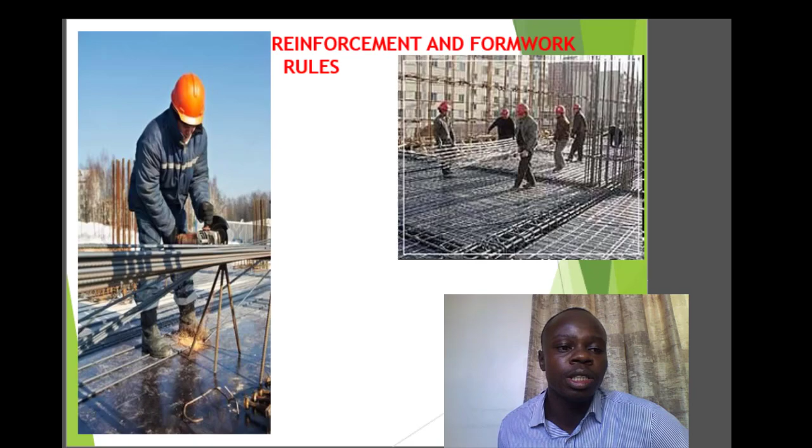Of course, there are the types of reinforcement. We'll have the Y or the T. Now those are the high tensile, and also the mild steel. So depending on which one you are applying, or for what purpose you are using that given reinforcement bar, then you will select the appropriate one.

And of course, the design for structural is also bestowed on the structural engineer, but then you, as an estimator or quantity surveyor, you basically need to know at your fingertips the type, so that at times when those details are not provided, you can make the right or informed assumption for that matter.

Yeah, that's why I've talked about, there is an abbreviation for that, Y or T, that we'll look into later on. So Y/T simply means the high tensile bars, especially used for reinforcement.

Also they are always described in terms of the diameter of those specific bars. You'll also see how, when we come to actual estimation or calculations, those diameters directly relate to what you have as the ultimate pricing of those given reinforcement bars.

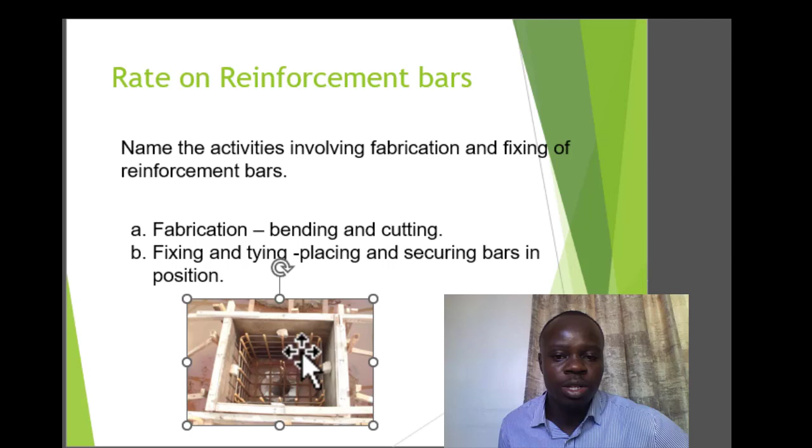So for relevance and also to stay focused on this course, there are these items that you might be aware of, but now we emphasize their relation to your estimation, so that you put it into perspective for those that might have seen it somewhere but are not certain of how to carry that forward into actually giving it an estimate.

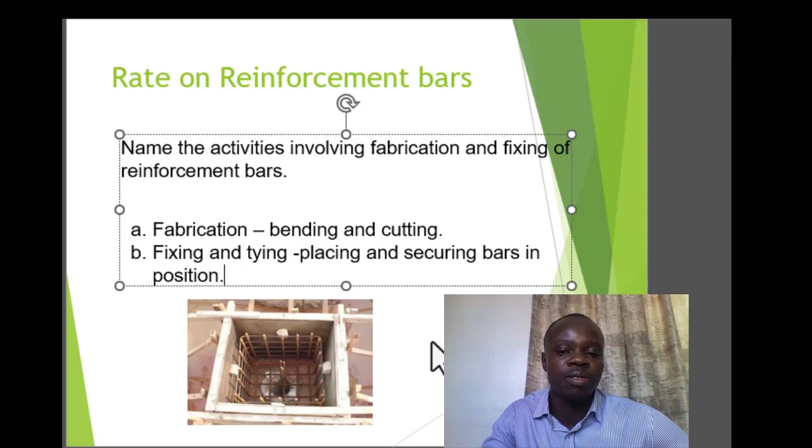So we need to learn the specific rules that guide you to take off the reinforcement. What do you need to refer to, and how do you do that in real sense and price and so on. That is coming at later stages of our beginner series for you to learn.

Okay, so these are some of the sequences that are available for our construction, and you can see them there. We have bending. You've bent the bars, you've prepared them in the shape that is required, and then you have the formwork. It's placed in position, ready to receive the concrete, plus all those considerations for the spacers and so on.

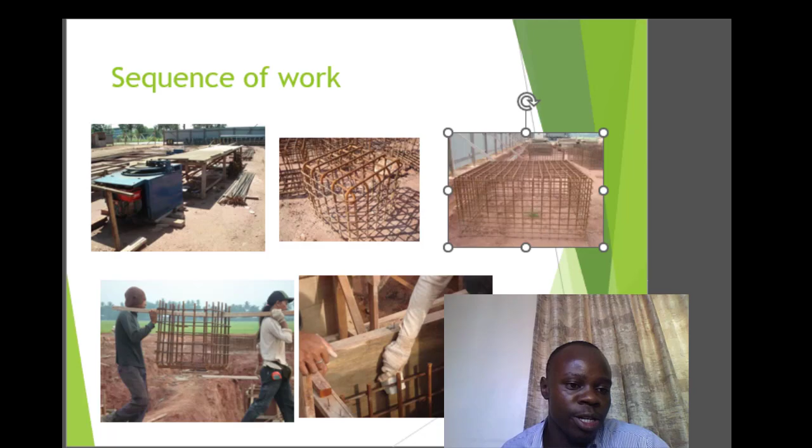This is just to show you a description, for you to actualize and internalize what we are talking about in terms of the reinforcement sequence of placement. So the reinforcement bars to slab. These are just examples, items that you might have interacted with while on site or not.

So this channel wants to put into perspective how they arrived at bringing this number of bars in place, or how they arrived at the cost of this particular reinforcement for given elements for that particular work. So that said, we have different ways of placement.

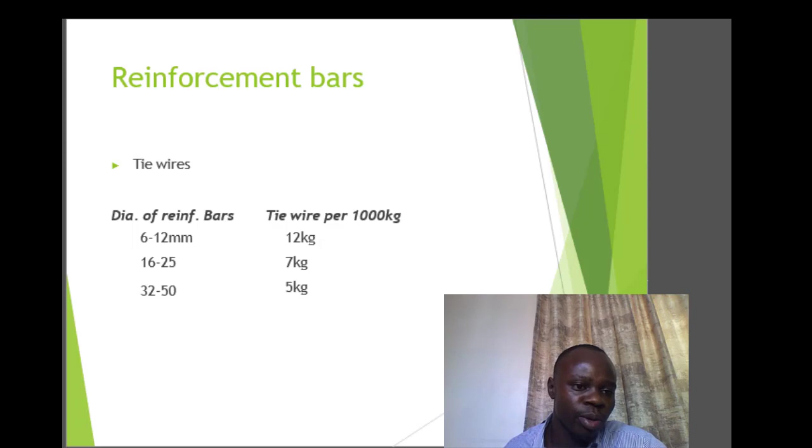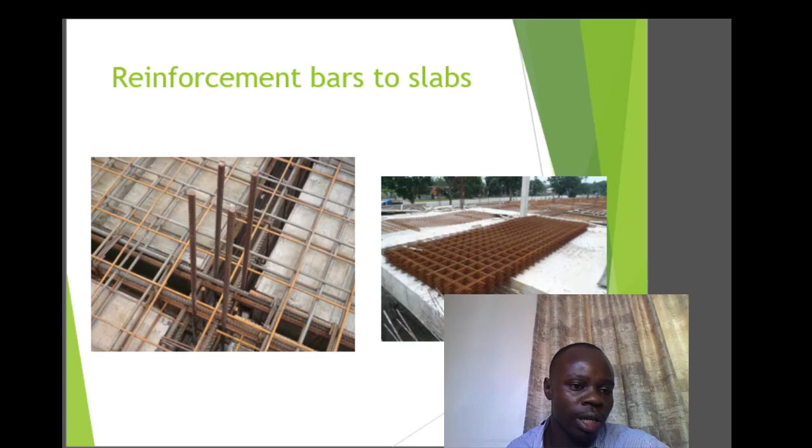Here we have the beams, there is a tying wire and so on. You have the long main bars, and then you have the ones called the links that are put across, especially for columns and also for your beams. So we'll see what the rule states about this. We've talked about reinforcement. This is how it looks, how they are placed.

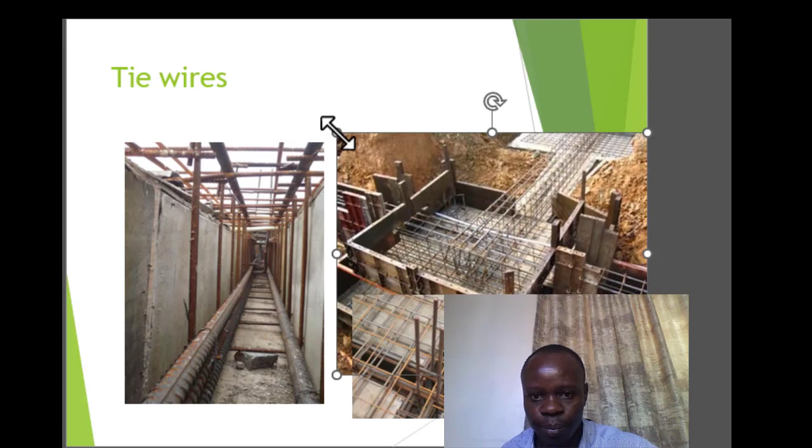Okay, so these are some of them. Let me just try to show it even better, so you're able to see it well. Yeah, that's better. I'll override the one at the back so that we focus on this one for now. So this is an example of the reinforcement that has been placed, ready to receive the concrete.

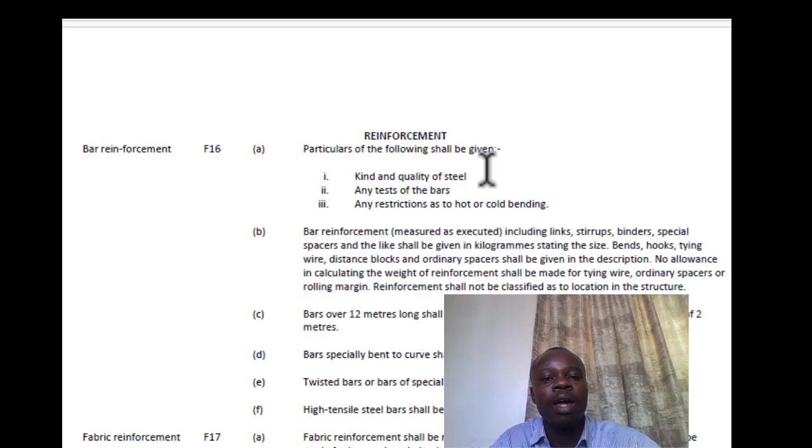So I would like us to look into the standard methods. What do the standard methods say about how to carry out the measurement for reinforcement bars? The standard method of measurement, the SMM, talks about kgs. So when you are carrying out the estimation for bars, you talk about kgs. But you can notice that when you look at the layout of how the reinforcement bars are placed, you can't directly tell how many kgs that is, but you can tell the length of those given bars.

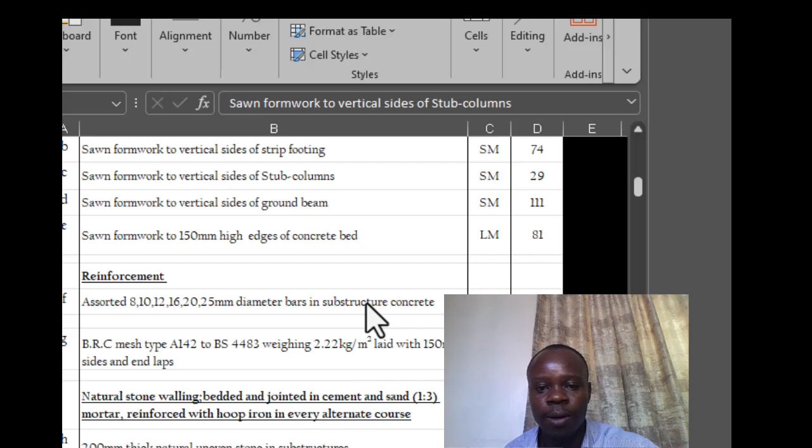So let me take you to the bills of quantities and we see how that has been expressed. We are talking about reinforcement. In this case they were assorted. To assort simply means that you measure all those items as one, rather than separating them in terms of diameters. So for every specific type of bar, for example D8, D10, D12, D16, D20, D25, all those are expressed in terms of kgs. So how did you arrive at kgs?

So I'll just give a hint, because this is an interesting topic that I always enjoy explaining, and however hectic it is, it's very interesting. You always feel the thrill when carrying out items to do with reinforcement. Unlike the other items, I'll give a hint to how we'll carry out this particular one, so that we appreciate how this was arrived at.

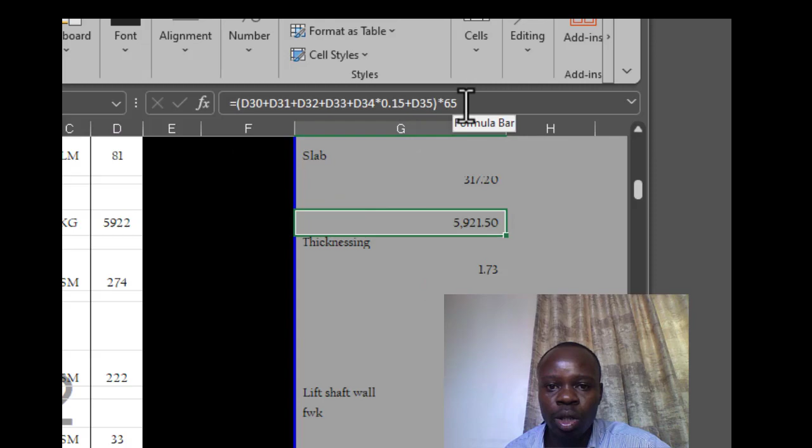Normally you talk about the specific items making up the kgs for that particular item. Let me give an example based on a different one. Say you have a beam, and your beam is 10 meters long. For the 10 meters, say you are using D12 bars for the main bars running along. So for the 10 meters you will take, for example, 10 meters.

So you'll have the length. You focus on the length because that is now what you can directly take off or measure from your given elements that have been provided. So you take the 10 meters and then you multiply by 4, because you're assuming that you have 2 at the top and then 2 at the bottom of that particular beam. So 10 times 4, that is now the total length.

Once you have that, then there is now a relation of the length, and then we now convert it into kgs. So normally it's the length that you have, and then you multiply by the diameter of that particular bar, squared. We've talked about D12, so 12 times 12, and then you divide by 162.

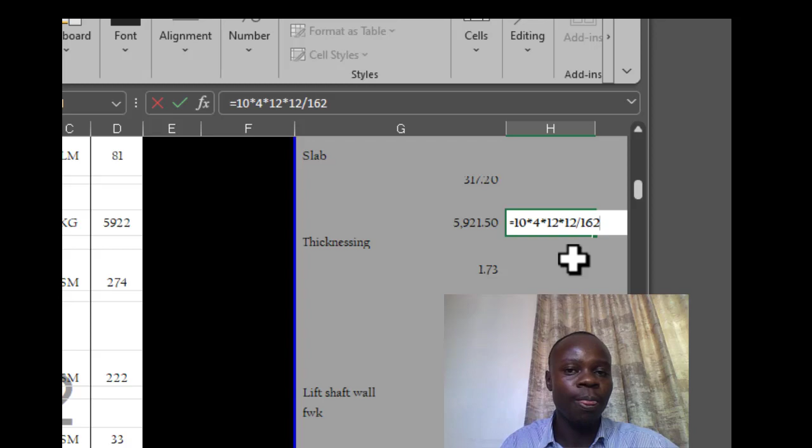So 162 is basically a constant that is used to convert length of the particular reinforcement bars into kgs. At some instance you might realize that there are those that use specific constants, for example 0.888. Those are normally a converted figure arrived at through the diameter squared divided by 162. So once you have that, you should be having your kgs. So that is now kgs for the main bars.

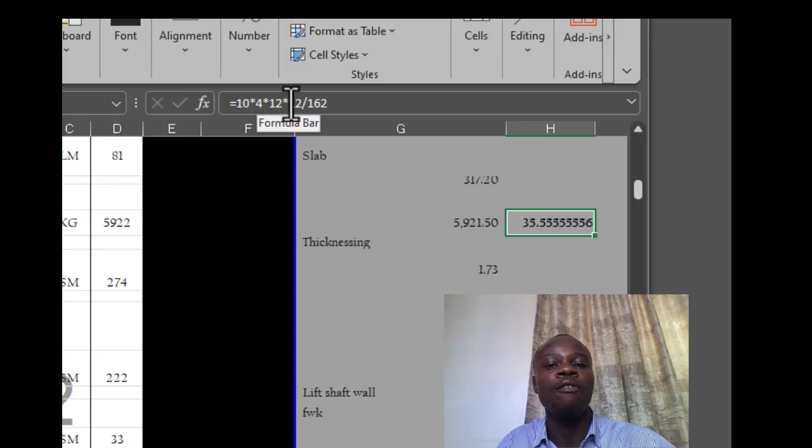But then now you'll need to go a notch higher and also add the kgs for the links, so that you have the full reinforcement for that particular beam. So you have the kgs for that particular one, and then we can also add to it the links that we've said. So for the links, we'll assume D8.

D8, and then our beam, for instance, is a beam of 200 on the breadth or the width, and the depth, let's talk about 300, so that we just talk about an average size of beam. We'll also talk about this further when we'll be taking off from the actual drawings, translating into quantities, pricing, and making up the full bills of quantities.

But for now, because this is an area that is so interesting to me, it's one of those items that I've decided to bring in-depth explanation on how to carry out the works. So we talk about the links for the reinforcement beams, and this is how it goes. We are using an example of a 200 breadth and 300 deep beam for that particular structure. So what we need to do first is get the length of that link.

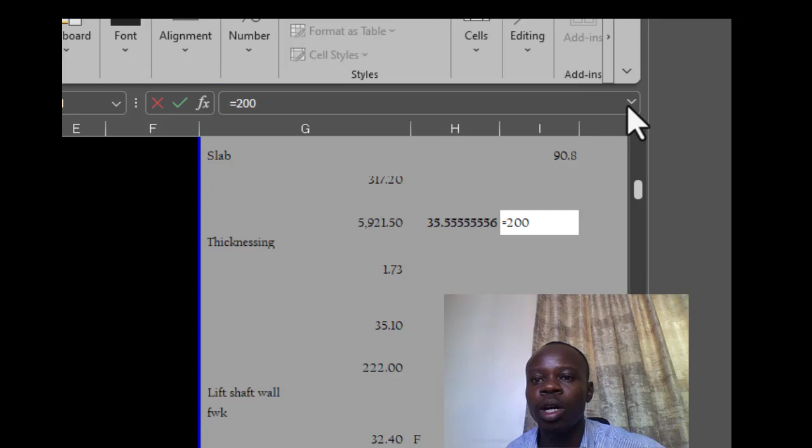From the 200 we less 25 on either side, so that is 25 times 2, so that we have the length of the reinforcement bar at the bottom, the width in that case. So that we get 150, and then we add to it the depth of that particular beam. We said it's 300, therefore we need to do 300.

We can put this into brackets so that we don't have a mix-up in terms of what we are carrying out. So we have 300, then we do the same, 25 at the top for concrete cover, and also 25 at the bottom for concrete cover. So that is another 25 times 2. That brings us to the total for the length and width. In this case we can add another bracket outside, so that we take our resultant figure and multiply it by 2, because we're now having basically a perimeter of that particular reinforcement bar. So we multiply by 2.

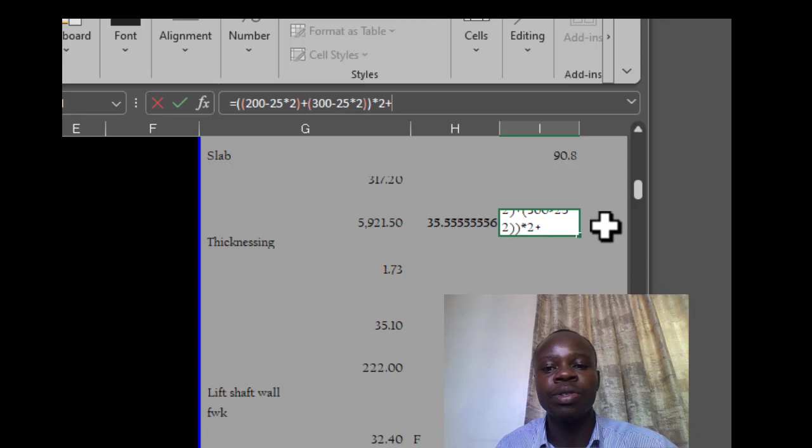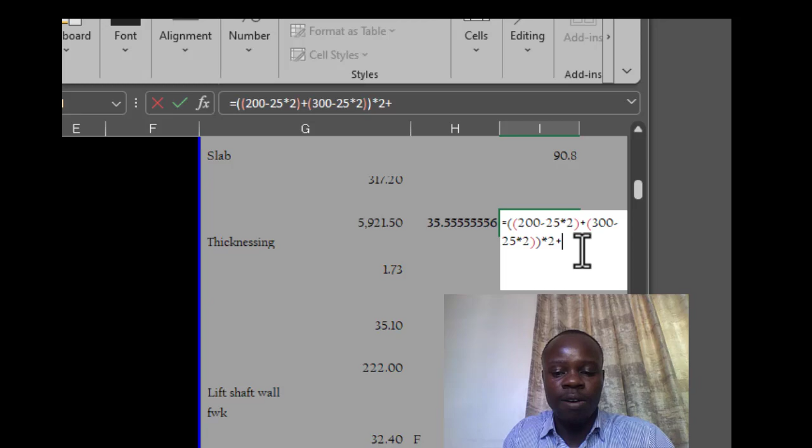So all those will be covered later on as we move deeper into the details of these reinforcement bars, cover, and so on. Trust me, these items are very interesting, and you will learn more and more as we go on. So we can take the hooks to be, for instance, 50 millimeters in this case, 50 times 2. So we have 900 millimeters for the length of that particular link.

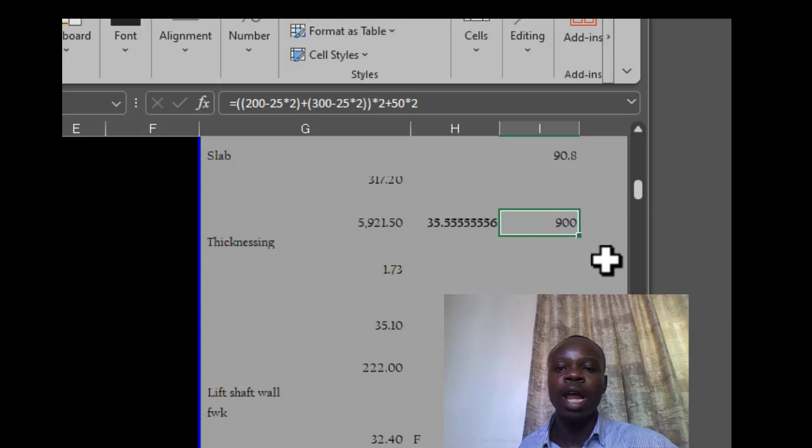So once we have the length, we adopt the other procedure that we had. So this is now the length. Of course, the length has to be in meters. So that is 900, which will be 0.9 in meters. Then you multiply by the diameter squared, that is 8 times 8, then you divide by 162. Of course, there is something we have missed out: the number of those bars. They are links spaced at 200.

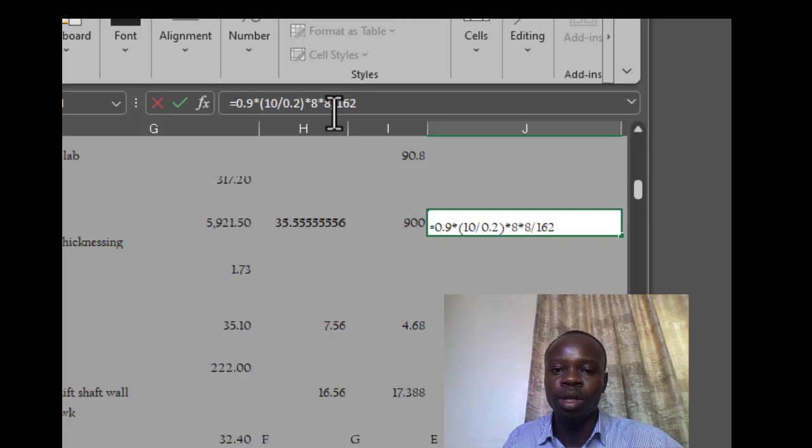So let's talk about that here. In terms of the number, 0.9 is one of them, and then we multiply by the number. In brackets, we said it's an ideal 10 meter long beam. So it's 10 divided by the spacing. In this case, let's talk about a spacing of 0.2 meters. Then you multiply by that. So in this case, we should have 17 kgs of reinforcement.

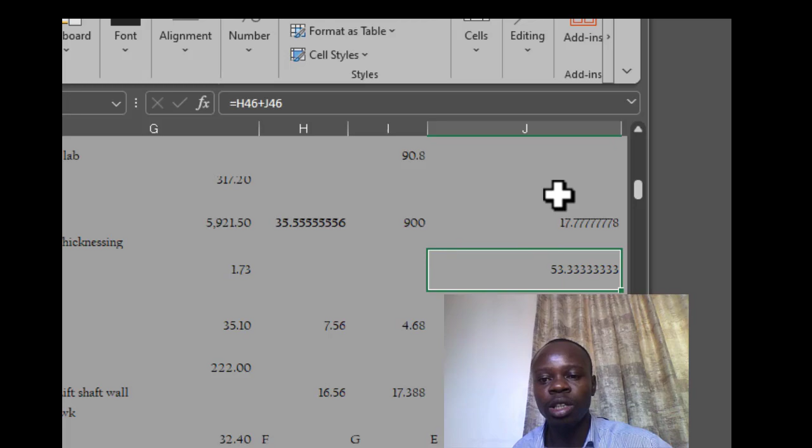Then we add the main bars, which were 12 millimeters dia, and then we add the links, that is 8 millimeters dia, and then we have 53.3 kgs for the reinforcement of that particular beam. So from the length you have, you can now relate to how you arrive at kgs.

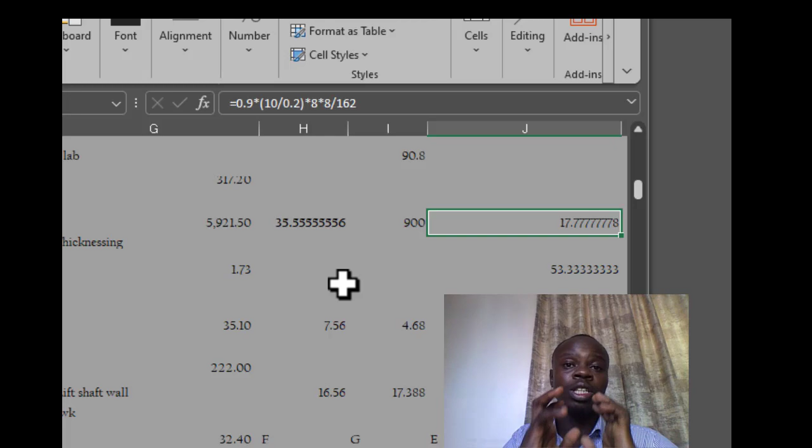Just to bring in a point, that method of measurement is constant in terms of translating your length. For instance, if you are using other forms of measurement that require you to do it in tons, let me say new rules of measurement, then you simply need a way of converting this. Once you have your length from your drawings, you might have a constant already done for you to convert that length into kgs or tons. Alternatively, you can have other constants to convert it into kgs.

But as you are aware, the relation of numbers is constant across, so even if you are watching this video from a different geographical area where other standard methods of measurement are applicable, you have your kgs. It can easily be converted into tons by dividing by 1000. So I told you that reinforcement is quite interesting because of the diversity. If it's a reinforcement bar, you do it in kgs, and if you need it in tons, you can straight away do that.

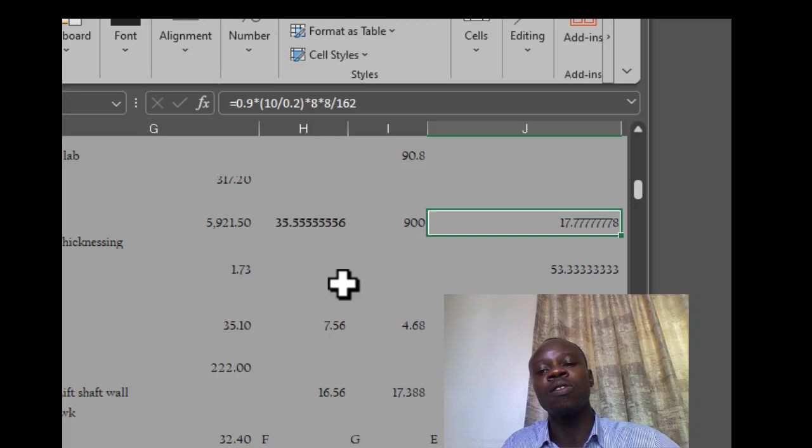You can also Google conversion factors. Conversion factors may be online, and that can be done in just a click. So it's interesting, but you need to know how they build on each other in terms of how to relate and how to do your measurement and get your estimation right.

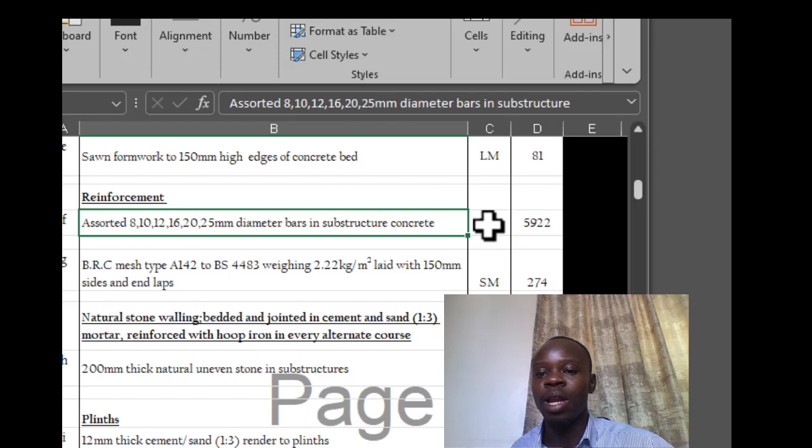So that is well explained, I believe, and it's really going to help you moving forward, even before we get into actual calculations based on actual drawings, which we will do together one-on-one till you understand how it goes. You now have an idea. In fact, you can now take off a basic structure. You can take off and measure the reinforcement of a given beam or column, because it's so easy based on what I've just explained to you.

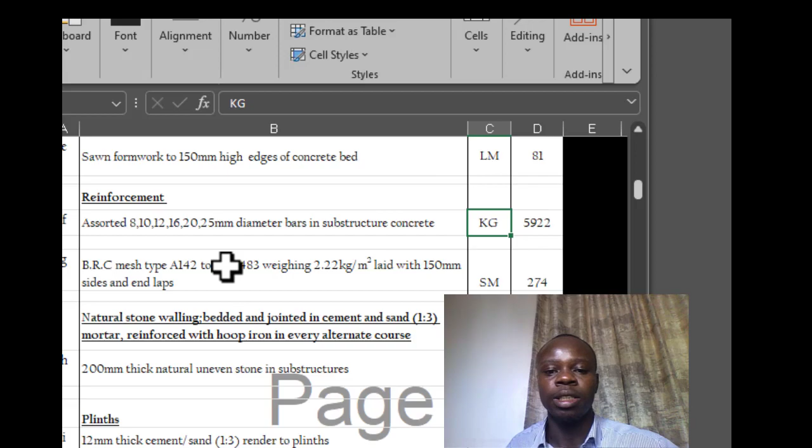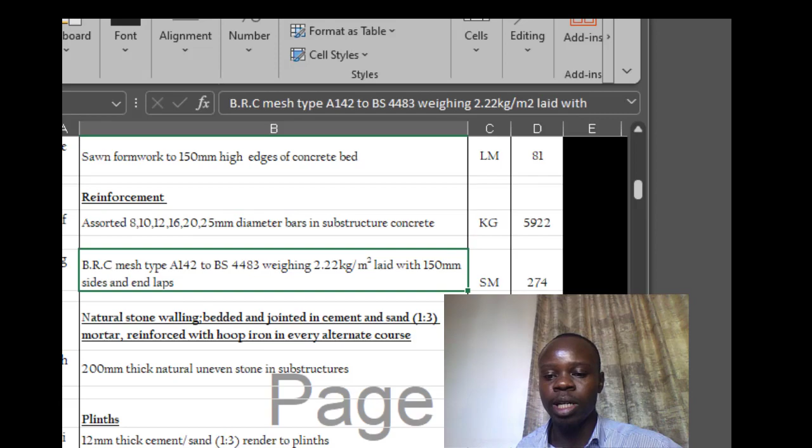The pricing, which you will come to realize later on, depends on the cost of material, labor, and so on, which will be built up as we go on with our coverage and estimation. Now this one is done in square meters. You can confirm from this, it is the fabric reinforcement. This one is here. Let me just highlight it if you can't see that well.

Yeah, so we have it in terms of square meters. Okay, so you can find it there. Basically you have to remember that this is still part of section F, talking about concrete building up in terms of all the items that are associated with it, including reinforcement, including formwork, because it's one and the same thing. But then they are different in terms of the materials associated with them and how it's done, but it's under what we call reinforcement work.

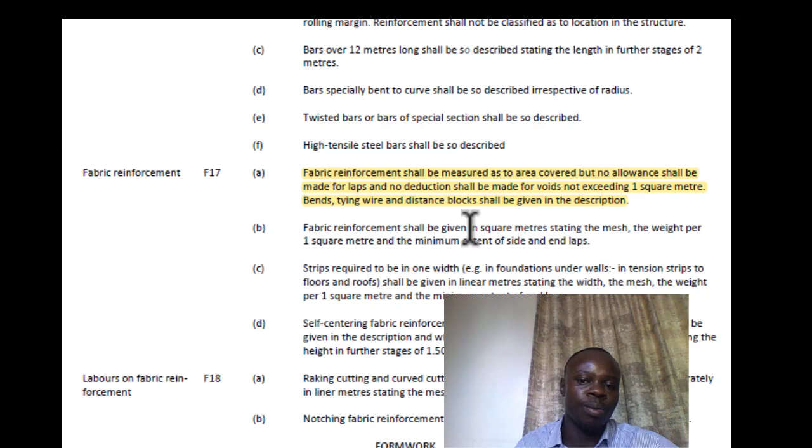So all those are falling within section F of the standard method of measurement. And this is across as well in terms of the works I've handled. Also in those other rules, you'll find concrete, and then there's also a subsection of concrete works. There's a subsection of concrete, a subsection of fabric reinforcement, bar reinforcement, and so on. So we've talked about that, and I believe it's quite well taken for you in terms of understanding.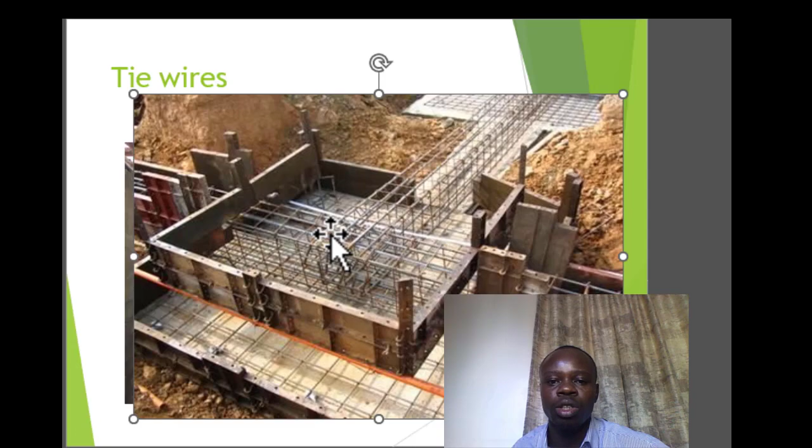Now we move to the last section on the coverage for this particular session. That is now the formwork. You want to just see how this is carried out. So for your formwork, formwork depends on where you're laying it, or the purpose of that given formwork. Let me just give a brief presentation here so that we see. So we are talking about formwork, whose definition can be, as it has been presented there, a mold or open box container into which fresh concrete is poured.

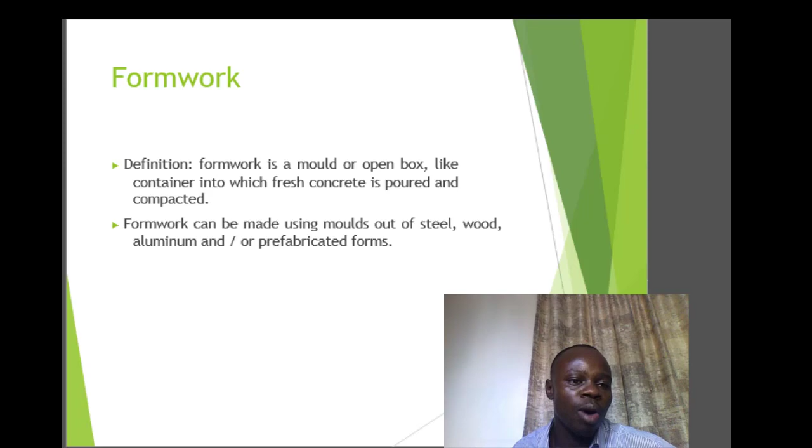Definitely you understand why you have to put it there. Fresh wet concrete doesn't have the strength to keep the shape and the size as per the design, so you need to contain it within a particular size so that you have the size that was designed. You contain it until it gains strength after compacting and vibrating and so on. So in brief, that is the reason why you have your formwork in place. There are different types. You can have steel, plastic, timber formwork, aluminium formwork. They come in various varieties, as you can see.

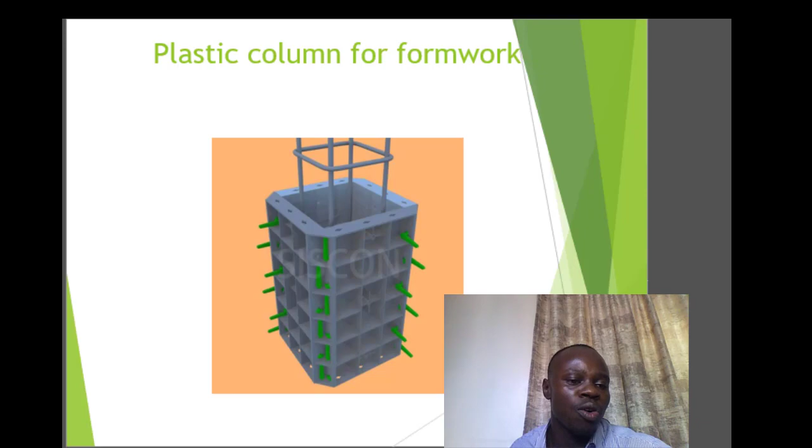It still works, depending on the intended quality that you need for your final product. Formwork determines a lot the quality of the product. For instance, you can use a plain sheet in some instances, and you will realize that you have a fair finish of concrete at the end of the day. So depending on how much you're cutting the cost and the quality that you need, different formworks have different purposes, and as long as it works for you, it's suited. But make sure that quality is always a priority at every particular time.

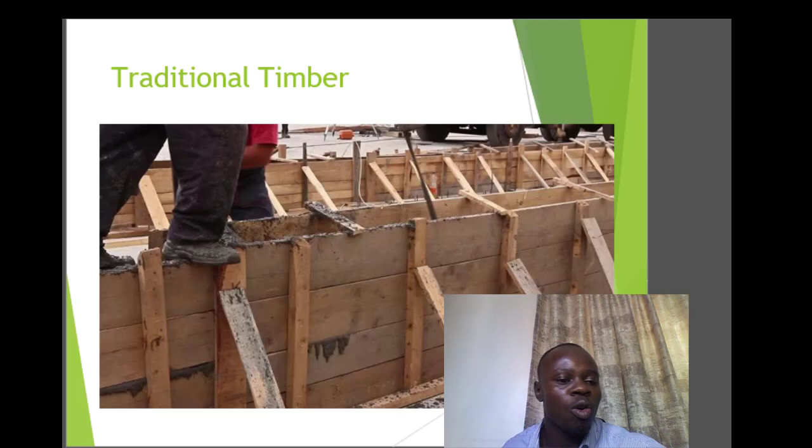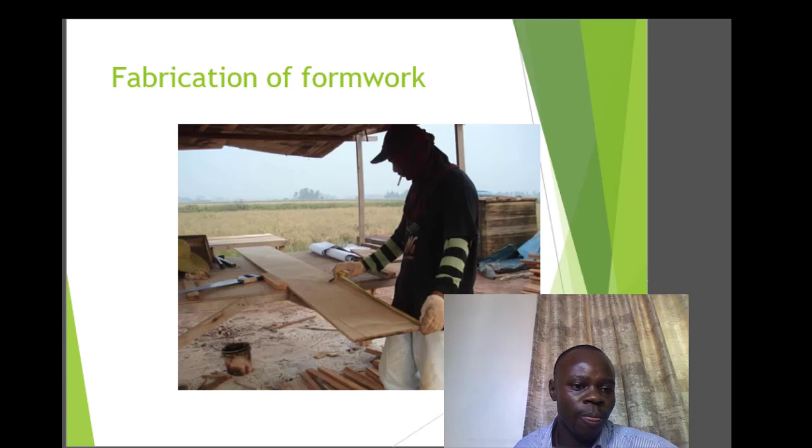So this one is going on. You can see casting is happening there. This is also another. This looks like a ground beam. Casting is done, vibration of that concrete, and so on. So after that is done, you install it in place, of course after you've done your reinforcement, based on the program that is applicable. You set in your formwork, you set in your reinforcement, then you come and tie in your formwork in that given area.

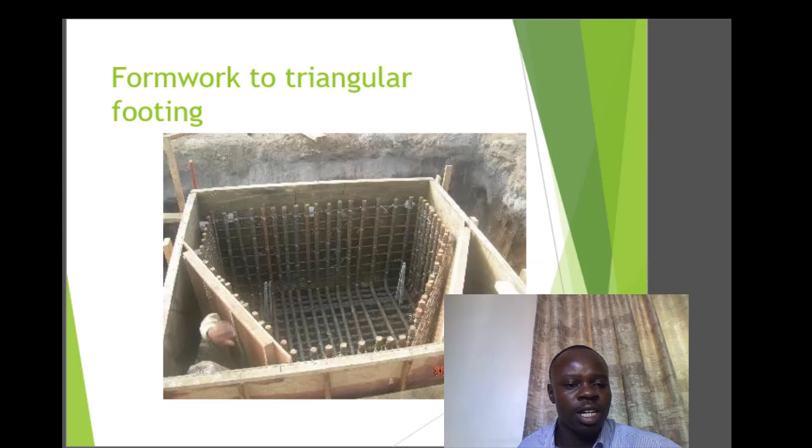So once you have that, you as a quantity surveyor or an estimator need to know how this is done, because you've already pictured the items involved in setting out this particular formwork. So in terms of rules, there are always what we call categories of formwork. Those categories will determine how you are going to take them off. Starting from the foundation, for instance, you have what we call sides of the foundations. That is done in square meters.

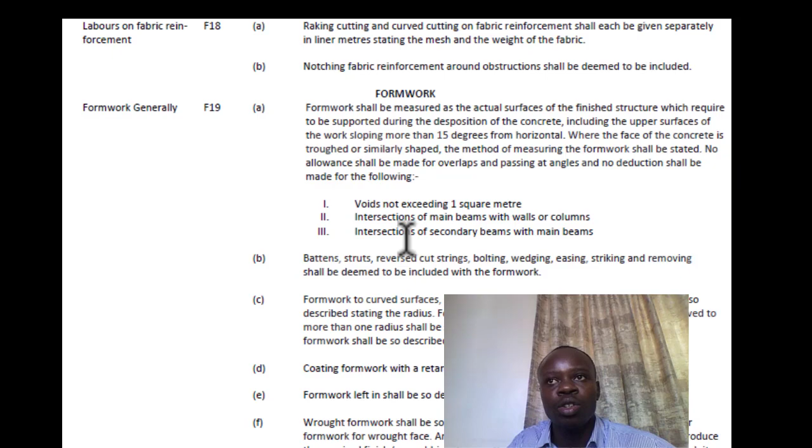Okay, sides of foundations in square meters. You can have pad foundations, you can have also just what we call the sides of the strip footing. So in that case, just get the length and get the width. So the width of that particular formwork is directly related to the depth of the concrete that you're casting in place. So that is the depth that you use. If you're using 200 millimeters thick, then get the length of your strip footing, then you multiply by the depth of the footing, which is the 200, then you get the area on both sides.

Okay, when you're talking about pad foundations, then it is the total length. So for instance, you're talking about a square pad foundation of 1000. So do 1000 times 4, you get the total length. Okay, then you multiply by the depth of that. Let me say it's 300 millimeters deep, multiply by 0.3, you get your area times the number of column pads in that particular manner.

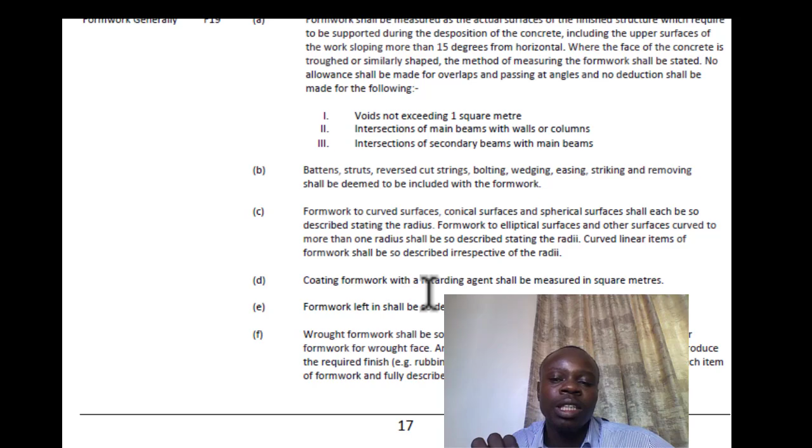Go to the stub columns. These are now the columns at the foundation level. Okay, you do it in square meters. So you can get what you call the girth, which is basically, if you're dealing with a column of 200 by 300, you do your girth by adding the 2 plus 3 times 2. That is 0.2 plus 0.3, that is 0.5, times 2, so that brings you 1 meter in terms of girth. Then times the height, maybe it's 1. You do that, multiply by the number of columns up to the superstructure level.

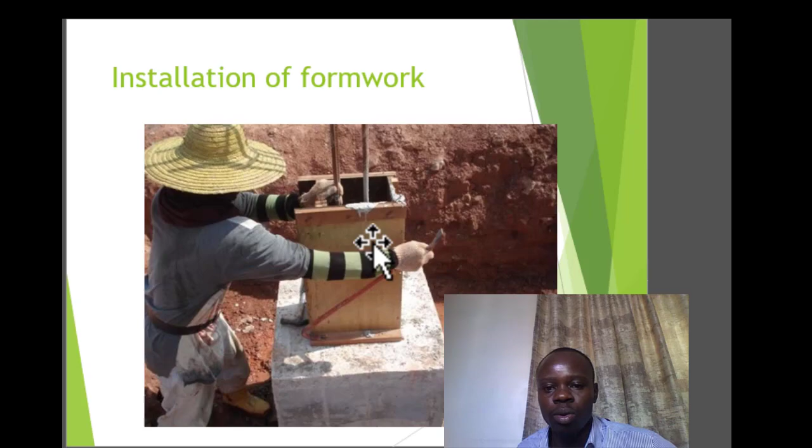Yeah, now this is now a column. Up to the superstructure level, we start from the column. Whatever you've done for the measurement for the substructure is the same to the top. Of course you need not worry much about the details and the actual calculations for today, because we are covering the rules for the moment, and then in the later stages we're going to carry out the actual measurements of these particular items.

So there is no need to worry, you are going to understand them so well that from here you just request any drawing that you want and do your estimation. If you are an architect watching this, you are able to interrogate the quantities you are given, because you already have the basics, you already know the rules that guide these items.

So for the beams, it's also the sides and soffits of the beams. Okay, that is if they are suspended. Of course, if it's a ground beam, just the sides. Suspended beams, then you do sides and soffits. You do the girth, that you'll also see later on. Do the girth in terms of depth times 2, then you add the width. After having the girth, now you get the total length of that particular beam. Once you have that, you get your square meters. If you're talking about a wall, square meters also, length times the height.

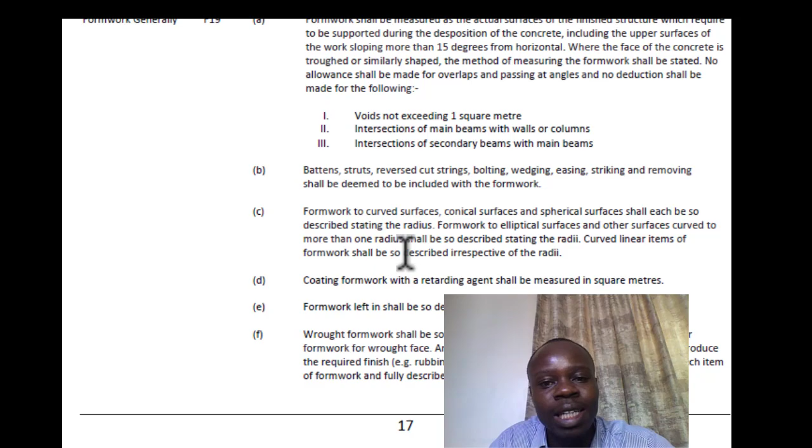So that is a basic, general summary of the rules that guide your estimation for formwork in various items.

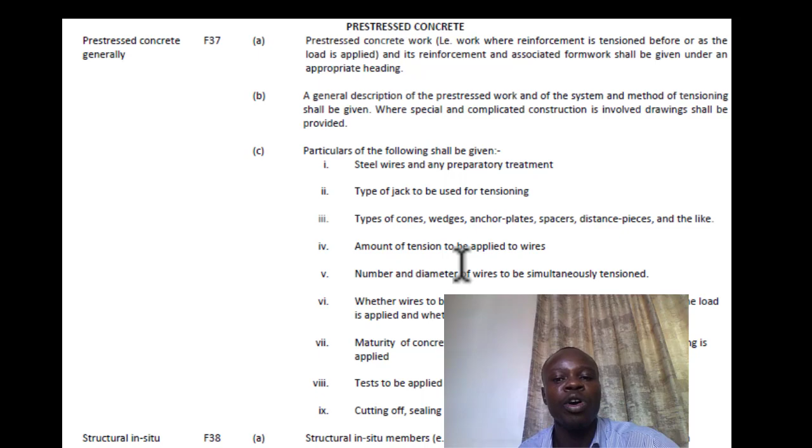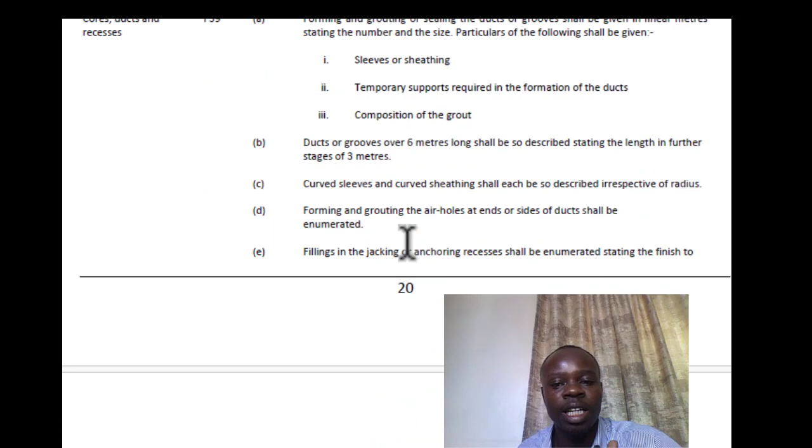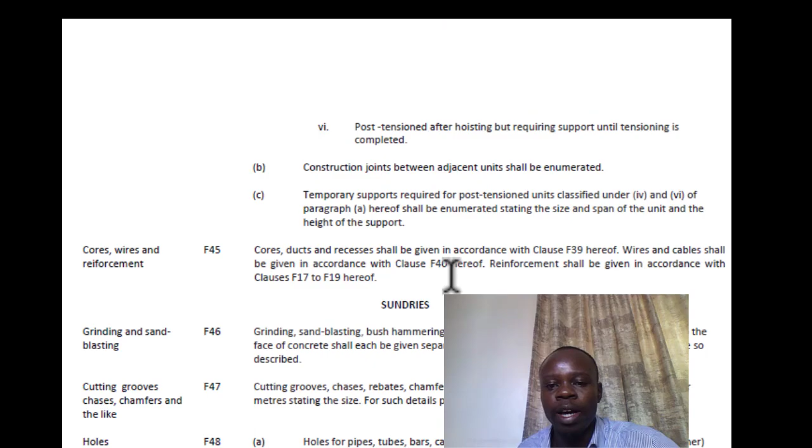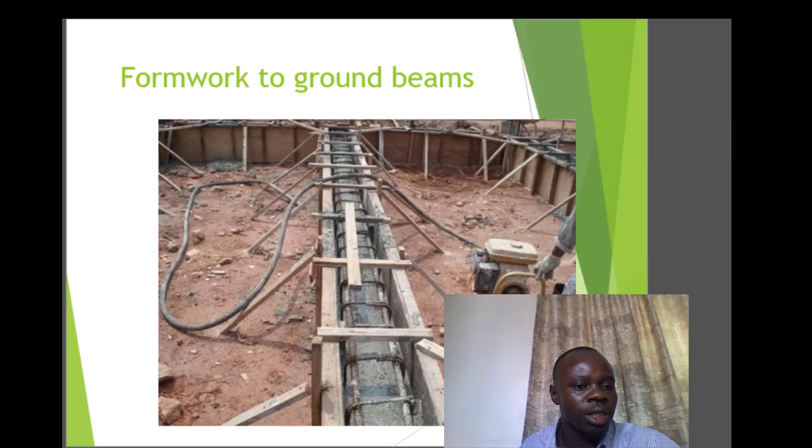So that brings us to the end of our session for today, beginner series 005. That was focusing on concrete work, I mean reinforcement and also formwork.